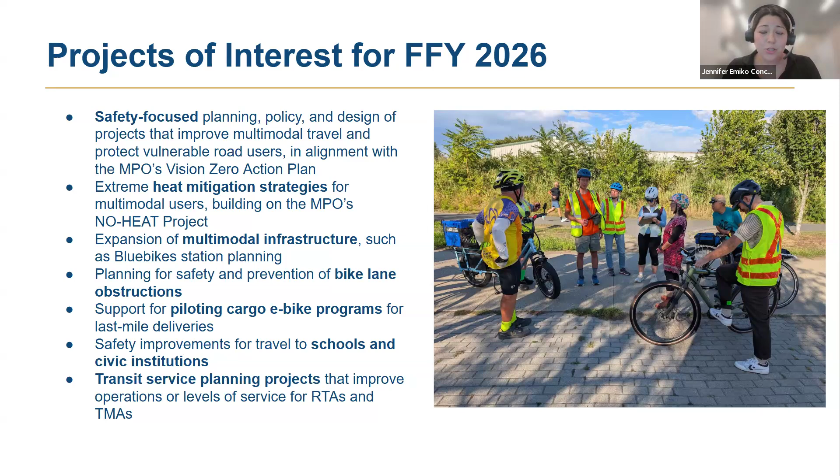And if there's anything on here that starts to spark your interest or you recognize as a project in your town that you've always wanted to attempt, please reach out to us. The first step can be just an introductory conversation. And later on in this webinar, I will drop a link to an opportunity for you to just schedule a quick office hours with our team so we can start that conversation.

In terms of an application to submit for technical assistance, again, it's very easy. We ask that you just go online. There is a Google form that you can fill out with some simple information, starting with a point of contact, a short description of your project in 500 words or less. We would also love to see an explanation of how you see this project impacting and improving the transportation system, especially at a regional level, given that we are a regional organization.

So an estimated timeline. And then, of course, we would like all our projects to be aligned with long-range transportation goals, so you can start to select which one of those your project potentially aligns with. After you submit this information, we will set up a time to chat with you about you and your project. And if we decide it's a good fit, at that point, you will be set up with a project manager from our team to actually start the work.

I should mention here that our TA program is a little bit different from other agencies within the region in that we do not ask for a match. Instead, we ask that you just provide us with staff time on your end and that time to coordinate with us and work alongside us, whether it's from the engagement stage to the actual recommendations and being able to review those.

And if you are at the very beginning stages of figuring out what kind of technical assistance project you want to work on, we also have additional resources which can help you identify what kind of project would be appropriate for your community. A few of those include the Vision Zero dashboard, which is our web-based application to help communities locate priority corridors along the high injury network. Like I said, the Vision Zero project manager is actually going to be presenting a little bit on that towards the end of this webinar, so you'll have some time to take a look at that together.

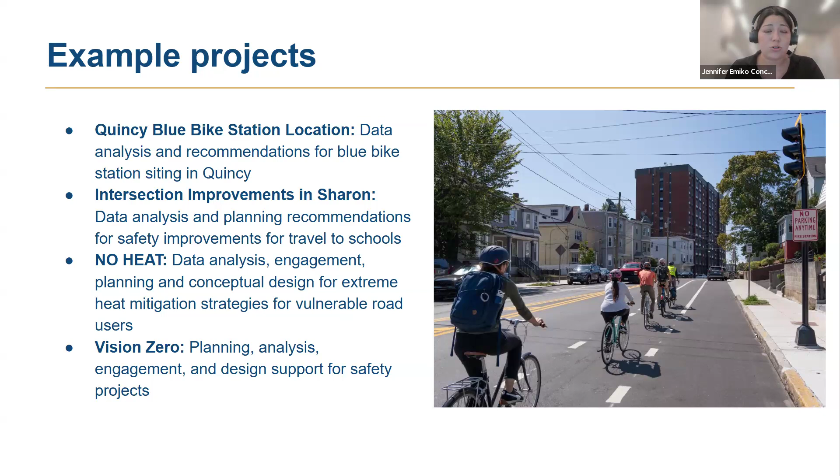No Heat, which is looking at data analysis, engagement, planning, and conceptual design for extreme heat mitigation strategies for vulnerable road users, which builds on a portfolio of work that we've been working on here at the MPO with a recent MVP grant. And then finally, Vision Zero, planning, analysis, engagement, and design support for safety projects, which builds on our most recent Vision Zero action plan, which is done at the regional level and is currently in draft stage, soon to be formalized. So with that, I am going to stop sharing my screen and pass it off to my colleague, Kyle Casiglio, who's going to be talking about the Quincy Blue Bike Station study.

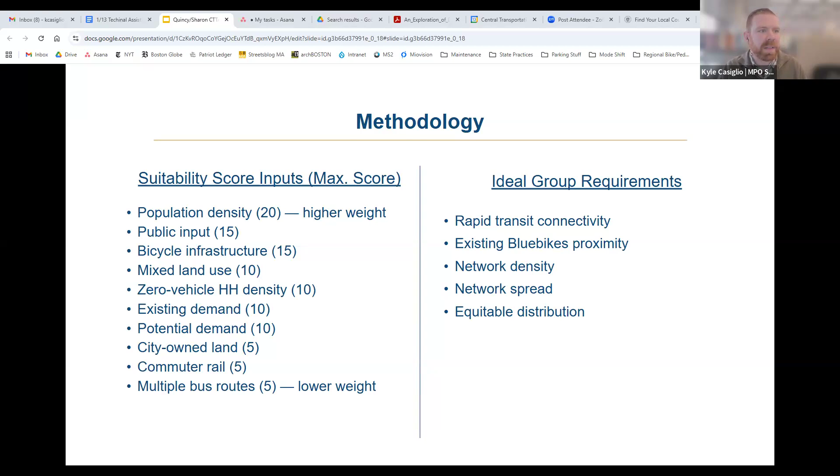So working with data analysts from our analysis and applications team, we applied this methodology to every census block in the city, which resulted in this map here. You can see the output of the scoring, where you can see high potential census blocks in green and lower scoring blocks in pink. If you're familiar with the geography of Quincy, this probably looks pretty intuitive to you.

You can really clearly see that central spine I was describing from North Quincy moving down to Quincy Center, where you see the large dark green block. And there it kind of splits, following both 3A to the east and continuing along the Red Line corridor to the south. So as we've said, the goal of this analysis was to improve connectivity to and from rapid transit.

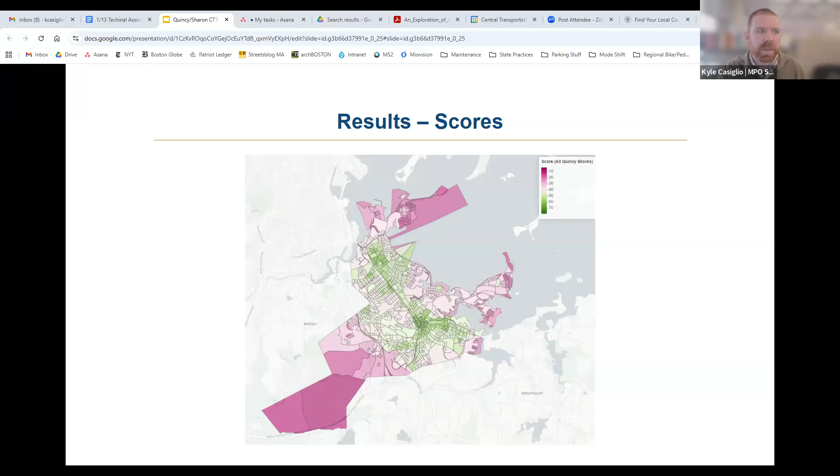So we couldn't simply lift the top 20 scoring blocks, or you would just see clusters of blocks all lumped together. So we imposed some rules on the analysis to make sure we were getting a dispersed network. And that leaves us with our final list of prioritized blocks. The ones you see green here are the ones that are proximate to the Red Line stations, and the pink ones being for the neighborhoods and destinations that are around the city. So you have the beaches, a lot of the neighborhood community centers, those types of areas.

Now, each of these blocks scored well for a variety of reasons, and the specifics of that we don't need to get into right now. But in terms of what we delivered to the city, it's a series of maps showing the output of the analyses and the rationale for why each census block received the score that it did, as well as a technical memo outlining the process, the methodology, and recommendations for next steps, such as pathways for funding.

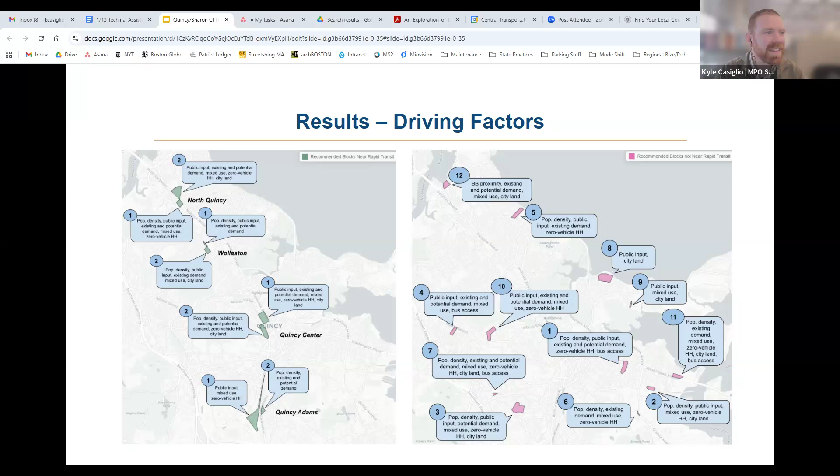The methodology that we used is transferable to other municipalities while remaining flexible enough to be modified for the specific context in a given city or town. We could use it for expansions in existing member municipalities as well as those that are looking to join the system. So this is work that we're really excited about. Active transportation is a big emphasis area that we're really hopeful to do some more work on.

With that, I'm going to pivot to some different technical assistance work that we engaged with the town of Sharon on, focusing on some intersection improvements to support safe routes to school. Sharon's a suburban town a little bit southwest of Boston with a population of about 18,000, so a very different municipal context than Quincy. This study examined the intersection of Pond Street, East Street, Quincy Street, and Massapoag Avenue, which is located near the geographic center of the town, and it's the northeastern corner of Lake Massapoag.

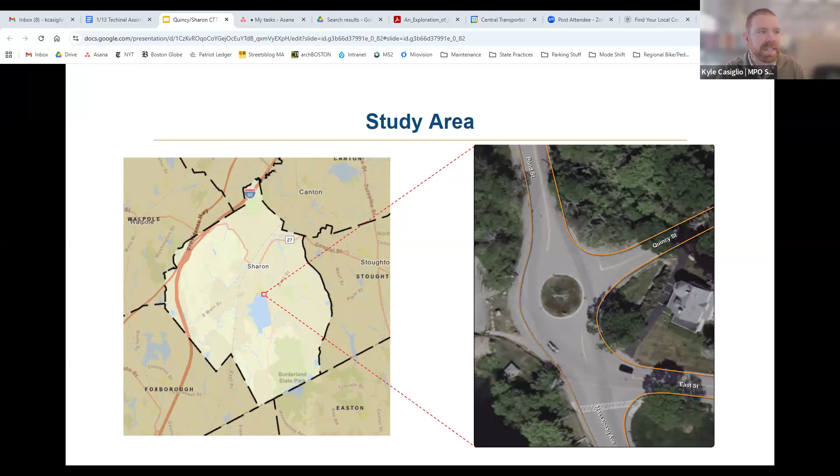The intersection is located just south of Sharon High School and about half a mile down the road from Sharon Middle School. And there's been a traffic circle there since the 1960s. The primary concern in this case that the town approached us with is that there's a significant public confusion about who has the right of way within the intersection. Southbound drivers that are trying to make a left turn onto East Street and northbound drivers entering the traffic circle from Massapoag Avenue don't really have clear guidance on who's supposed to yield to whom.

So the intersection's proximity to the two schools also introduces a lot of young pedestrians into the intersection, and as you can see, there's only one crosswalk, only one safe and legal crossing. Town staff also shared with us that they have concerns about speeding through the intersection, particularly by high school students when school lets out. And finally, we noticed that there's a trailhead between Pond Street and Quincy Street, which has no safe or legal crossing to access it, and which is supposed to connect to Lake Massapoag.

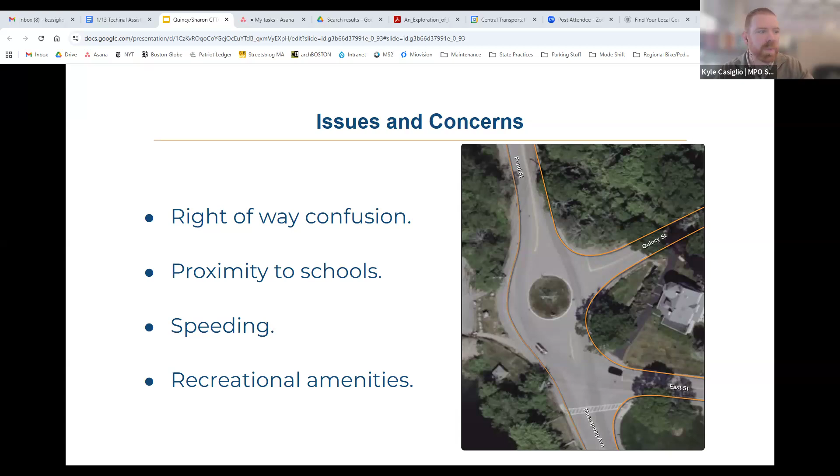Alongside these concerns, the town also shared with us two conceptual design proposals for intersection reconstruction that would have removed the traffic circle and replaced it with either a signalized or stop sign controlled intersection, which we evaluated for safety and operational performance.

So for this study, we collected traffic counts and speed data at the approach to the intersection, and we found that traffic is pretty evenly split coming from Pond Street between East Street and Massapoag Avenue, with minimal traffic on Quincy Street. So in line with the town's concerns, we did also find concerning levels of speeding, particularly on Quincy

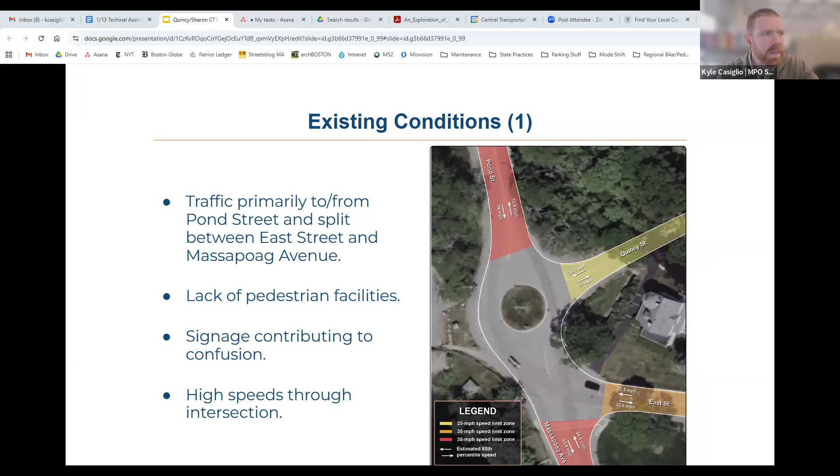Street. Notably, we also observed 85th percentile speeds that were far out of line with the 20-mile-per-hour school zone speed limit that's in effect just north of the study area where Sharon High School is located. This data was also consistent with what we observed during a site visit. And on that site visit, we saw several examples of that confusion with the right-of-way that we described before. We also noticed that signage was potentially exacerbating the confusion.

You can see on the right of this image a state law yield to rotary traffic sign, which is placed south of the intersection facing northbound drivers. This sign implies that traffic going northbound should be yielding to southbound traffic making a left onto East Street, when in fact, drivers have left the rotary already, and that left turning traffic should be yielding to northbound traffic.

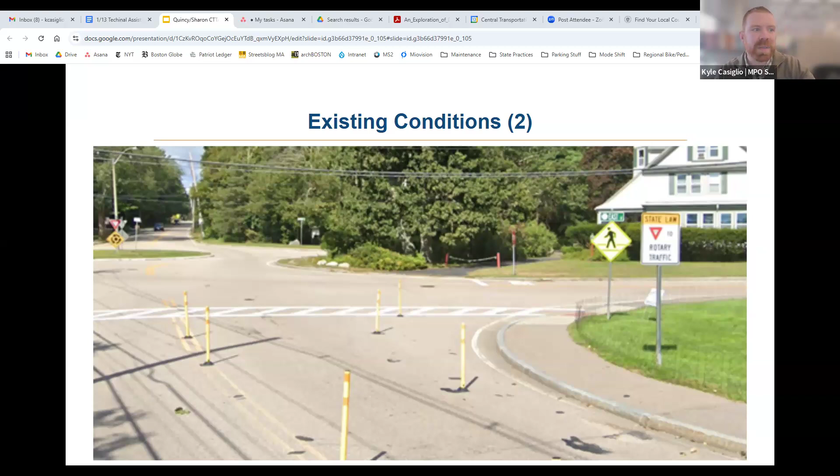Now, fortunately, despite observing many instances of this hesitating confusion, we were able to confirm through both MassDOT and the Sharon Police Department that this confusion has not resulted in a crash during the 5-year period that we looked at. So while we experienced many near misses, there actually hasn't been a crash because of this confusion.

So based on the field visit and the data that we collected, we made a number of short and longer term recommendations to improve the intersection. First of all, moving that state law yield to traffic in the rotary sign north of East Street to clarify that it is the people who are driving south that are supposed to be yielding to those traveling north.

We recommended implementing crosswalks and rectangular rapid flashing beacons, or RRFBs, across Pond Street to connect Lake Massapoag and the Massapoag Trailhead. And in the longer term, incorporating bicycle facilities throughout the intersection, incorporating traffic calming elements to help reduce speeding.

And finally, we did assess both of the intersection reconstruction conceptual designs. However, given the lack of instances of crashes at the intersection, we did not find that either was going to pencil out from a cost-benefit perspective.

So this concludes my portion of the presentation. I'm going to pass it along to my colleague Carmen, who's going to be talking about how we plan to provide data analysis, engagement, planning, and conceptual design services for extreme heat mitigation strategies for vulnerable road users. Thank you all very much.

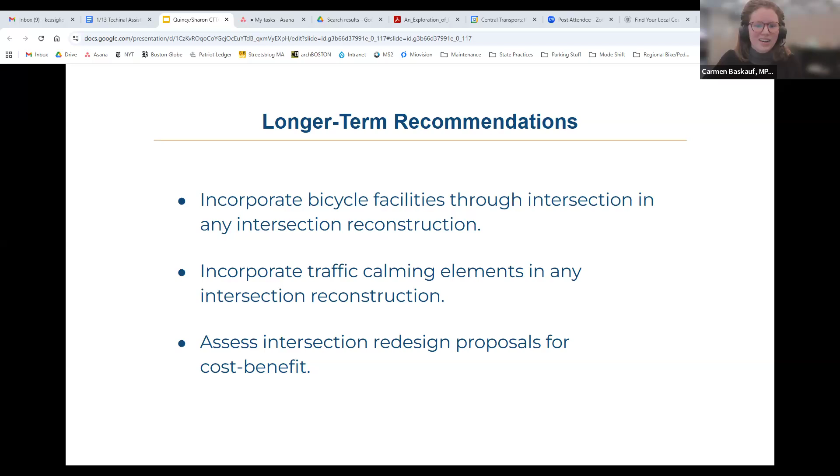All right. Thank you, Kyle. My name is Carmen Baskauf. I'm a transportation planner with a multimodal planning and design team. And I'm going to share some information about a project we've been working on, which is looking at the impacts of extreme heat on people walking or people biking.

And heat may not be the first thing you're thinking of when you think about transportation challenges, but through this project, we're really looking at ways that extreme heat can be a real barrier to active transportation in our communities. So this project is called Neutralizing Onerous Heat Effects on Active Transportations, or No Heat. And as I mentioned, this is focused on heat risk for people walking and biking. This particular project has been funded through a $1 million MVP grant from the state.

And our project so far has had kind of two stages. So the first stage involves creating data sets which help us identify the highest risk heat areas in our region for people walking and biking. And then building on those data sets in stage two, we've been developing heat mitigation pilots at priority locations in our partner municipalities. And this is a collaborative effort between us at the MPO, our academic partners at Georgia Tech, and then the partner municipalities who are Chelsea, Everett, Revere, and Framingham, as well as a number of community-based organizations.

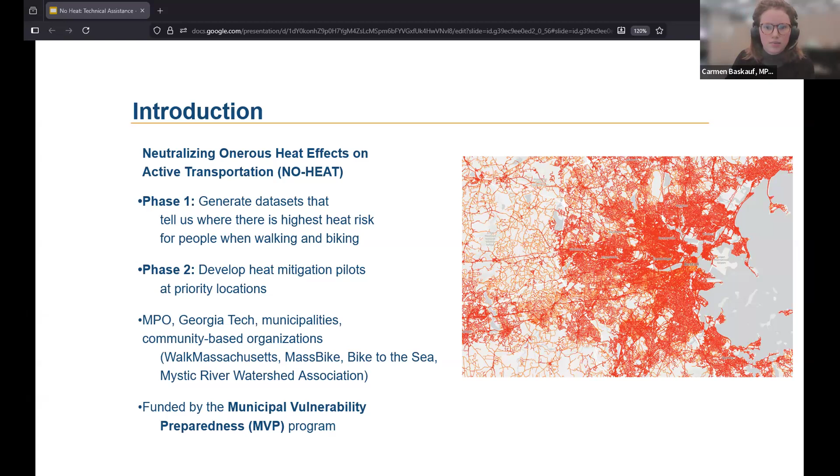So this project is really kind of trying to answer the question of how do we look at heat on a human scale? And certainly there are existing data sources that can tell us about heat geographically. Land surface temperature is a widespread available source. And this can tell us things about, for instance, disparities between neighborhoods, but it's not available at a very high resolution.

And to understand heat at the human scale that's relevant for people walking and biking, we really need to be able to capture differences to the level of a difference between a shady street and a sunny street a few blocks apart, for example. Land surface temperature also is from satellite data, so it captures that kind of top-down view, looking at places like rooftops. This again tells you things about what's going on in the area, but that's not actually places people spend a lot of time walking and biking.

So for this project, we've developed a new data set that uses a measure called the Universal Thermal Climate Index. So this measure helps us better capture what heat feels like to a human. This is shaped by many factors beyond just temperature, things like shade, for example. And I think we can see this in this example on the map of Commonwealth Avenue. In the UTCI index map, we can see the cooling effect of the shade trees, which obviously makes a pretty big difference in the heat for people walking or biking there.

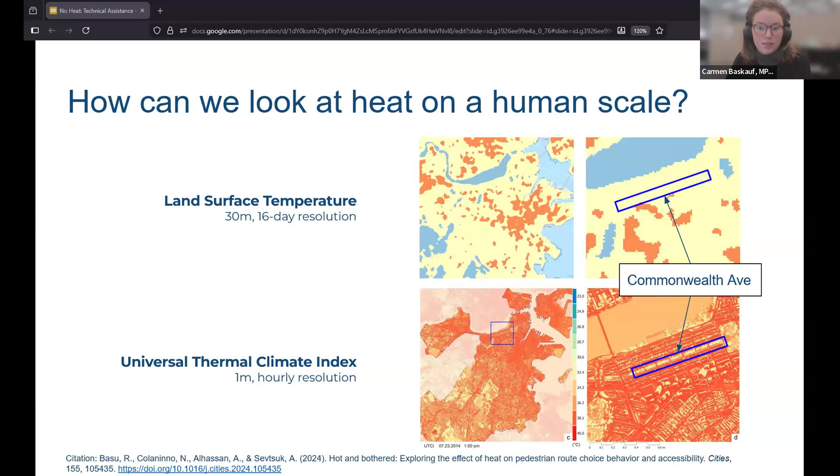And we're also able to generate this data at a much more fine-grained resolution, so at 1 meter square. This really helps us better understand specific route segments, and you can even see the difference between, say, one side of the street and the other side of the street at different times of day.

So just briefly, this Universal Thermal Climate Index, or UTCI, is a model that takes into account the way the human body experiences heat. So it uses factors like shadows from buildings or trees, wind speed, of course, also temperature and humidity. And then all of that is fed into a physiological model of how our body processes heat based on those factors. So this gives us a much better indicator of how heat is experienced in humans. I think we all can understand that 90 degrees in the shade on a breezy day feels pretty different than 90 degrees in the straight sun with no breeze at all. And we can also use UTCI values to understand the potential health impacts of extreme heat as well.

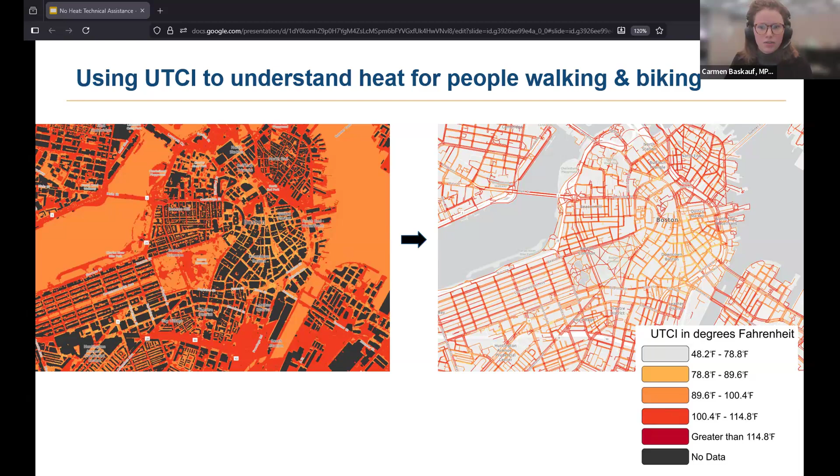So for this project, we looked at data from 2 hot days in the summer of 2023, and then we calculated what the UTCI value would be. So that would be what the temperature would feel like to a human outdoors. And we calculated this for every square meter in the Boston region. You can see that on the map on the left. So then we apply these UTCI values to the roadway network. This tells us what the temperature would feel like to a person walking or biking on each of these roadway segments.

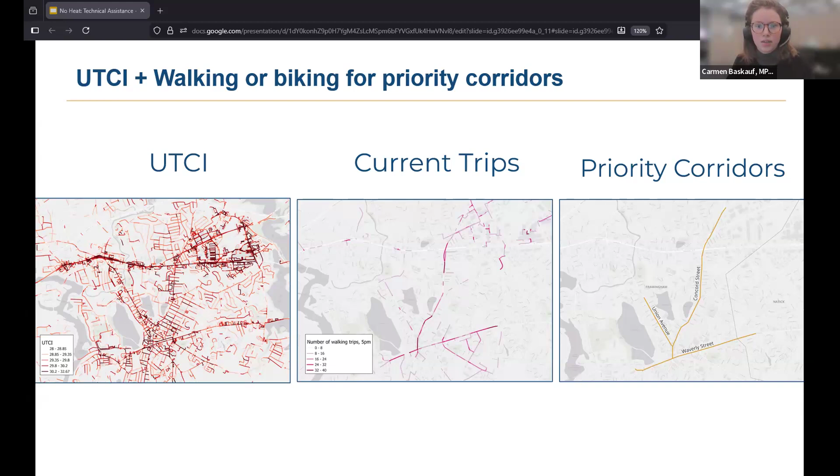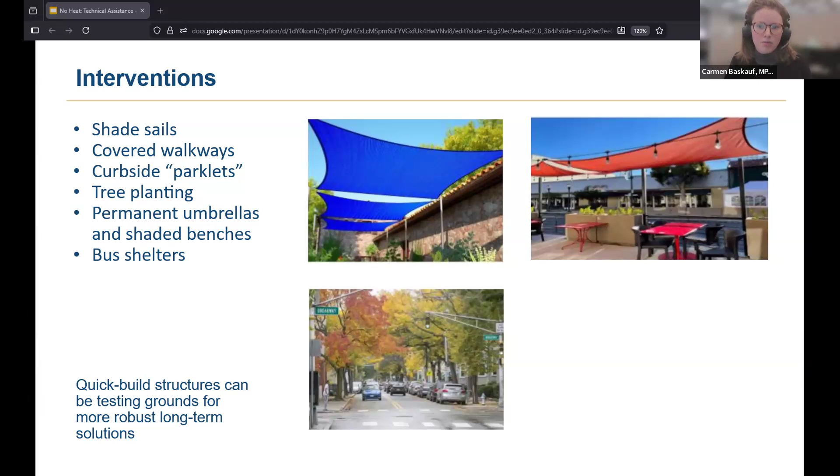When we initially applied for this grant, we imagined a broad list of what quick build interventions could potentially look like that would benefit people walking and biking. We explored a wide range of possible interventions, ranging from shade sails to bus shelters. In this project, we really see these small pilots as testing grounds for longer term, larger solutions. We know we can't plant a whole canopy of trees that will provide sufficient shade for someone walking or biking and have that be ready in the next few months before our grant period ends. But our hope is that people will experience these smaller pilots that provide shade, and then the feedback from these pilots will help inform longer term planning efforts for the cities we're working in.

So what can we help you with? What I've been describing so far is the work within our MVP grant, but this is a growing area of work for us in terms of understanding the impacts of extreme heat on active transportation. We'd love to talk with you about what this looks like in your community, potentially through a technical assistance project. So this could involve looking at the regional UTCI data set that we've created to help you identify priority corridors for heat mitigation, and also look at conducting engagement to ground truth that data through tools like walk or bike audits. We can help with planning and conceptual design recommendations for quick build or long-term infrastructure to help mitigate heat for active transportation users. And finally, we can support identifying funding for heat mitigating interventions.

I should also mention we are going to be submitting for a new round of funding that expands this work. And so if communities are interested in applying with us as a partner, that is also an option in addition to doing a TA project with us. I encourage you to get in touch with us.

So thank you. I'm going to hand it off now to my colleague, Ali Kleyman. She's going to be sharing a brief overview of how to use our new Vision Zero dashboard to inform selection of safety projects.

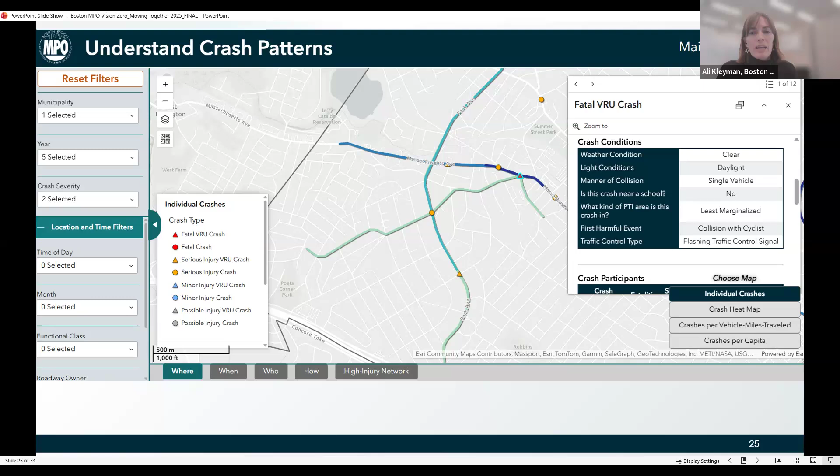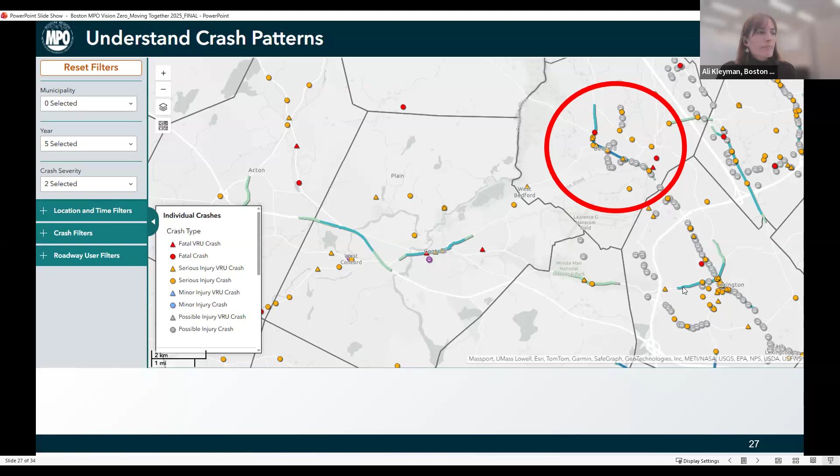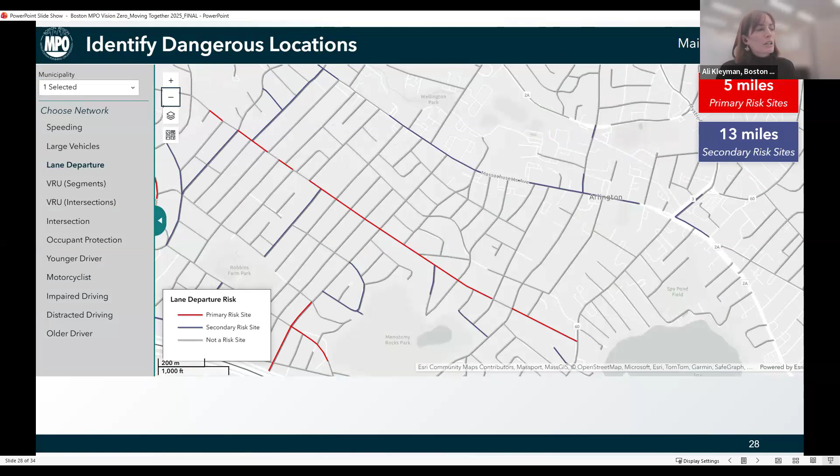And the next section of the dashboard is the risk section. We call this Identify Dangerous Locations. And either looking at the regional or municipal level, a user can select the specific risk type they're interested in and see primary and secondary risk locations. So this is showing Arlington and some of the high-risk locations for lane departure crashes.

And this is the Hear from the Community section. So the information that's in here right now is the feedback that we got in the stakeholder input map that we used during development of the action plan. And this is still open in the current dashboard, so people can continue to enter comments and safety concerns.

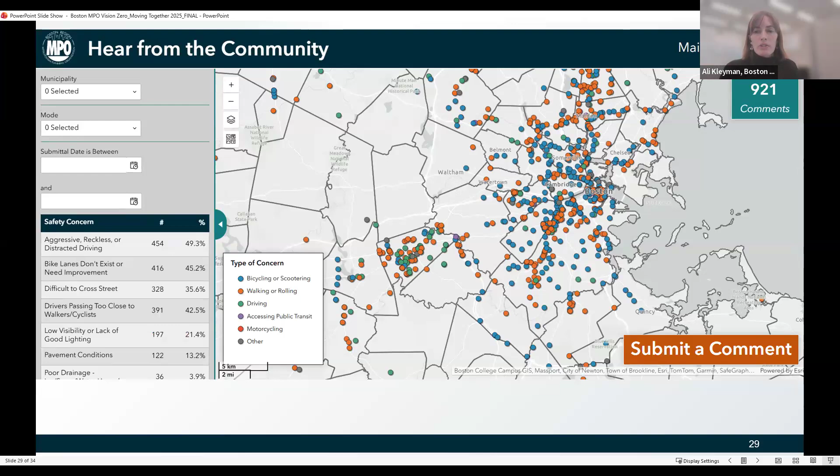So we don't just want to hand you a tool with this dashboard. We want to hear from you. Is this useful? Is there data missing or something else that could make this more useful for your roadway projects and safety work? Please let us know. Through the Technical Assistance Program or other MPO programs, we want to work with you to select dangerous locations and plan and design some of the safety interventions like Kyle and Carmen talked about. And we also hope that the dashboard can be useful to you in federal, state, or other regional funding applications.